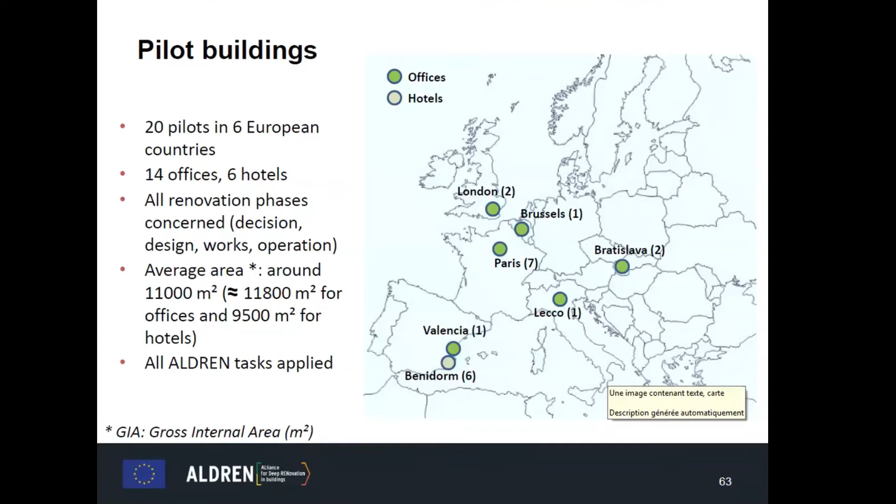Next, please. As I said before, we managed to apply all tasks, and each pilot represents one piece of the renovation process, not covering the entire ALDREN procedure. We tried to test as many indicators as possible for each pilot, but at minimum, it is through the sum of the 20 pilots that the whole ALDREN procedure has been tested. For example, we tested the TAIL index on 11 buildings, and the gap between calculated and actual energy performance on 7 buildings.

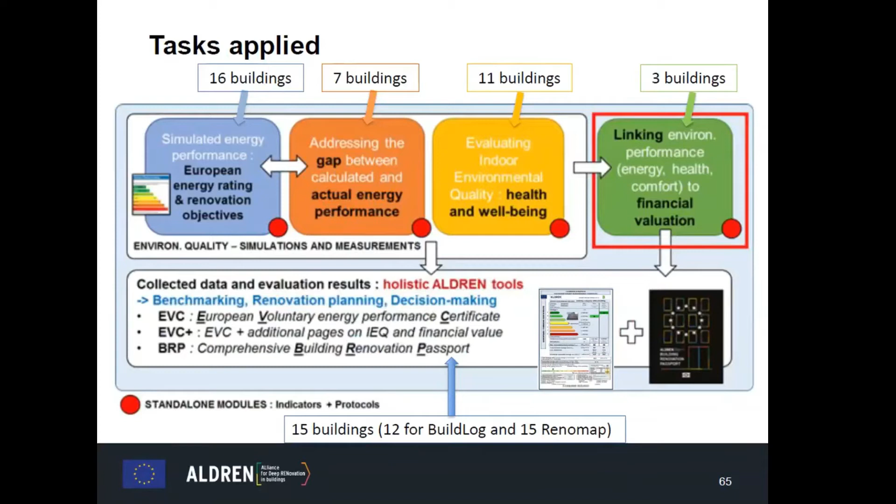Next, please. So what are the main results? Here you have the energy savings triggered by the project. This energy consumption is only for the end uses of the European directive on energy performance of buildings, so this is about heating, cooling, lighting, ventilation, and hot water only. We reached an average gain of 120 kilowatt-hours in primary energy per square meter a year, which corresponds to a gain of 3 to 4 classes on EVC rating, and we managed to reach class A or B for the majority of buildings tested.

You can also see in the table on the left the average consumption before and after for hotels and offices. For offices, the average gain is around 110 between before and after renovation. For hotels, this is a gain of about 150 kilowatt-hours per square meter a year. These results are very promising, in the sense that studies were not really conducted with design teams, but in parallel to their work, because of the time frame of ALDREN and of building projects.

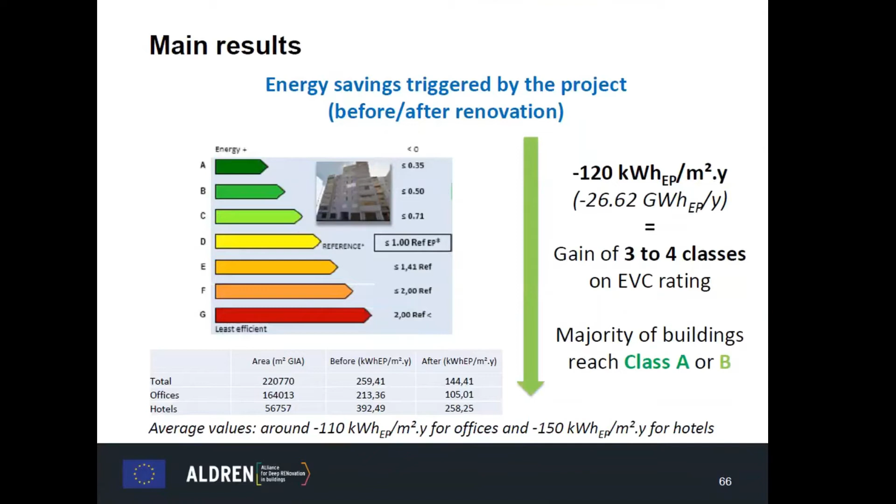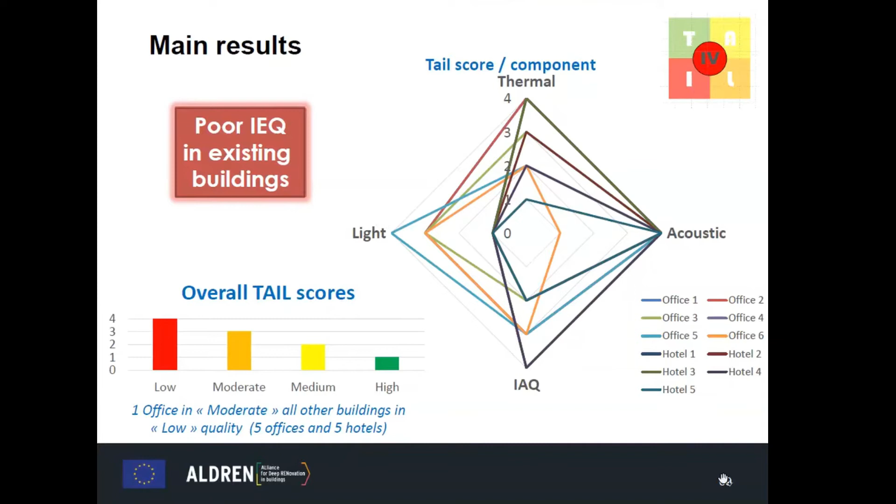We have all the buildings in low quality, except one, which is in moderate quality. I think this is because the overall TAIL score is the lowest class of the 4 components. But the main conclusion is that indoor environment quality is poor in existing buildings.

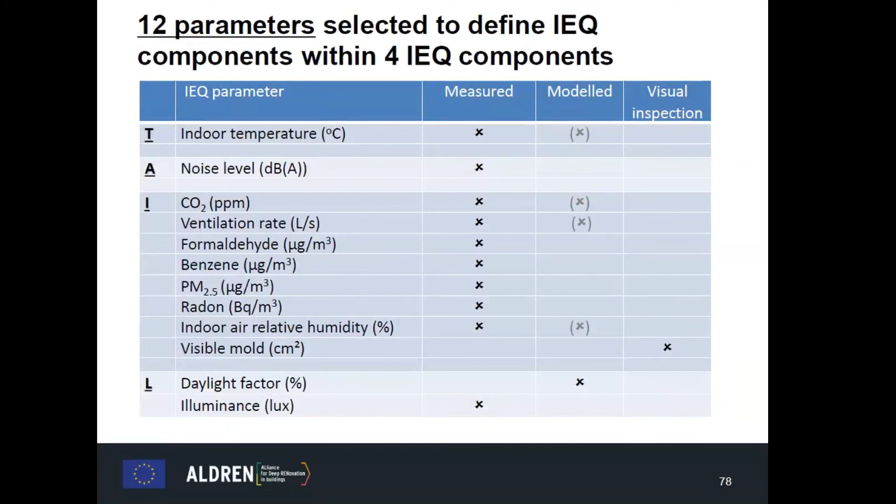Each of these 12 parameters is assessed according to 4 categories. These categories are defined by standards or by the World Health Organization, as we discussed earlier. For example, for formaldehyde, benzene, or radon, we use the different WHO guidelines that exist. So the 4 categories range from category 1, green, high level of quality, to category 4, red, poor quality. Each indicator is associated with a category at each monitoring location in the building.

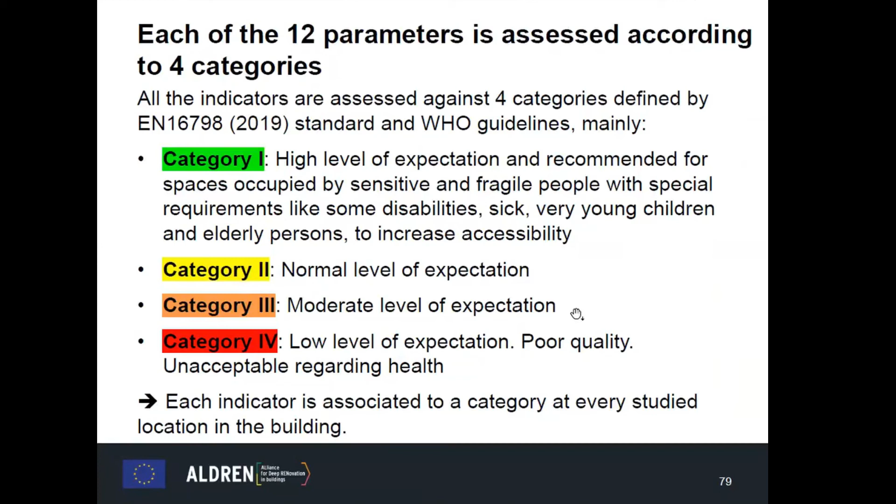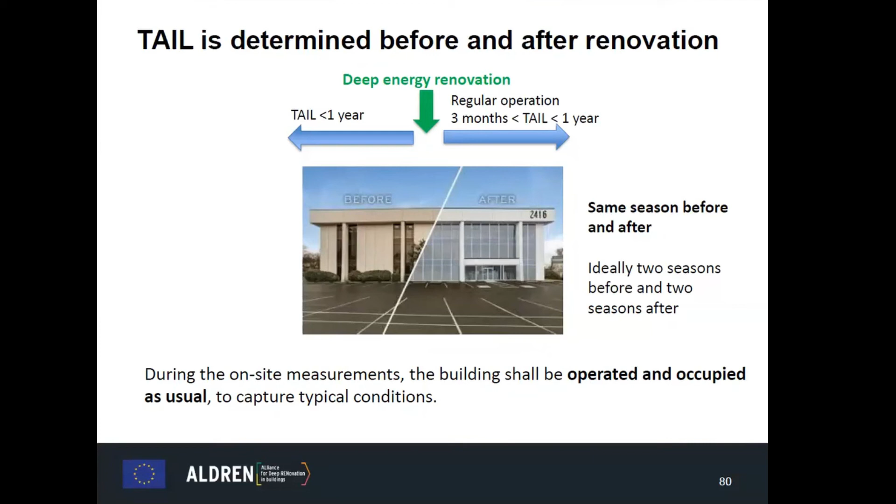Tail must be determined before and after renovation to be compared. And since we know there is a seasonal variation of indoor environment quality, to make a proper comparison, measurements must be made at the same season before and after the renovation. This is important for comparison. Another important point is that to capture the typical condition of building operation, the building must be operated and occupied as usual during the monitoring.

Regarding the number of sampling locations, of course we cannot measure everywhere in the building. This would be too complicated and too expensive. So we made a compromise between the representativeness of the sampling location and the technical and economic feasibility. This compromise is to instrument between 2 rooms in very small buildings and 10 rooms, and these 10 rooms must at least represent 10% of the occupied area of the buildings.

Once again, since we cannot measure everywhere, we measure preferentially in places that are occupied all the time by the occupants. In office buildings, and in rooms in hotels, we exclude the meeting rooms or the lobby, for example. And we must have a diversity among the sampling locations.

For example, we choose the lowest occupied level in the building and the highest. We must choose different orientations, rooms oriented to the street and rooms oriented to the garden. And if there are different types of offices, single offices and open plan offices, we must have a mix of all these different locations. Once again, all rooms must be normally occupied.

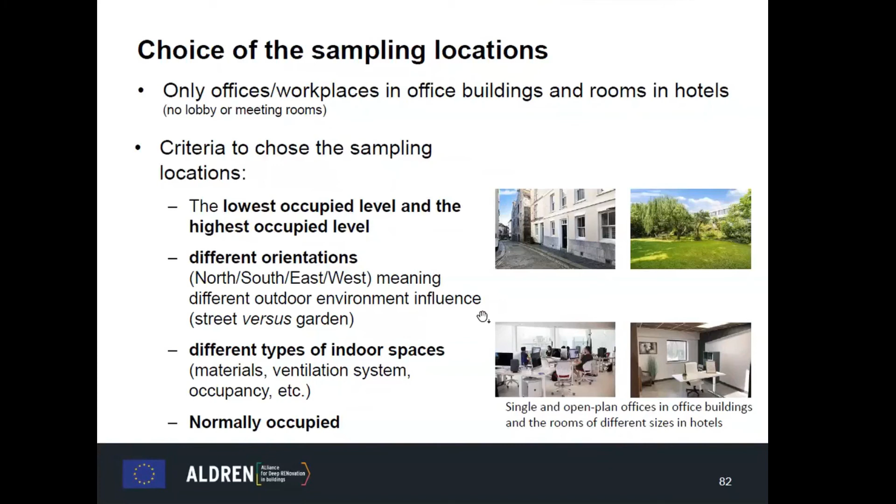The duration of sampling is different according to the parameters. It is 1 month for temperature and relative humidity, 2 months for radon according to the standard, and only if the building is in a radon-prone area. For all the other parameters, this is 1 week, from Monday to Friday in an office building, a typical working week, and from Monday to Monday, or Tuesday to Tuesday, or Wednesday to Wednesday in a hotel.

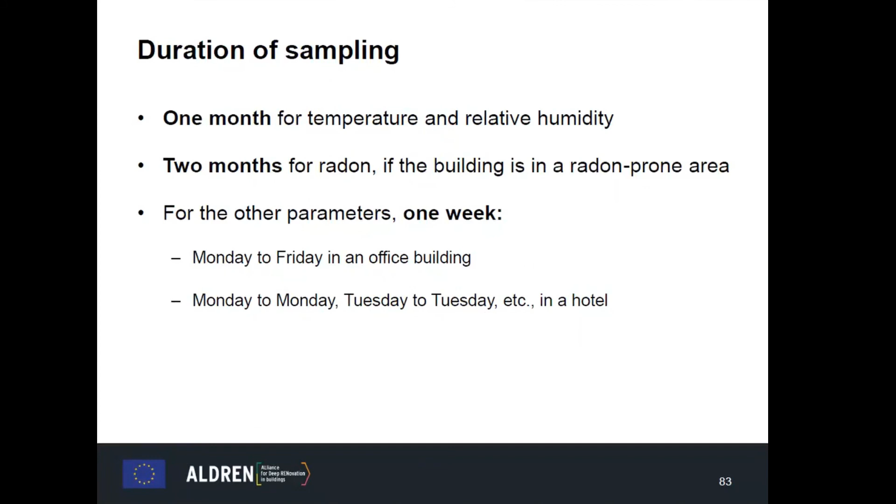So all this equipment must be put in the center of the room and must avoid direct sun or heating that would disturb the measurements.

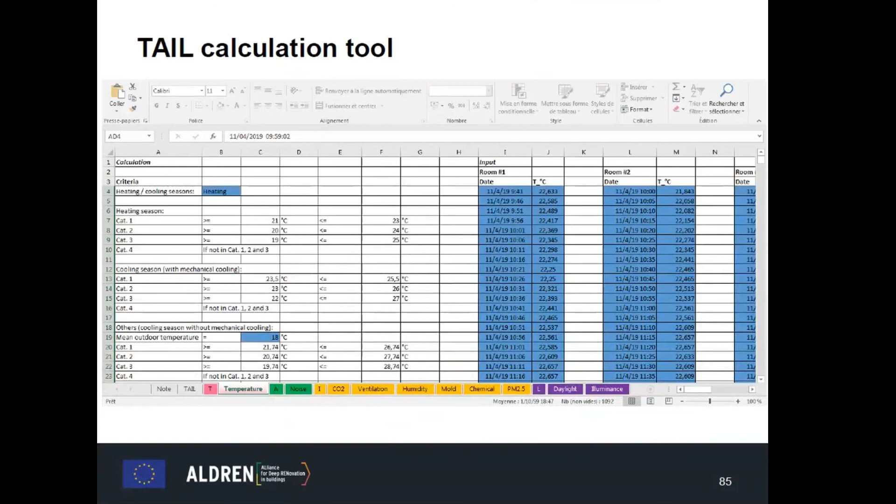To facilitate the calculation, we have elaborated an Excel sheet where you only put your measurement values in the blue cells, and all the calculation is done automatically for each parameter, and finally for the TAIL score, as you can see on the next slide. At the end, it directly calculates the TAIL score for the building.

So on the next slide, you will see the result of the TAIL calculation for the 6 office buildings and 5 hotels across Europe included in the ALDREN project. You can notice that there is a diversity for temperature, indoor air quality, and light, with light being the best parameter. But we observe a common feature for all the buildings, meaning a poor acoustic environment. This is something that needs to be targeted for the future.

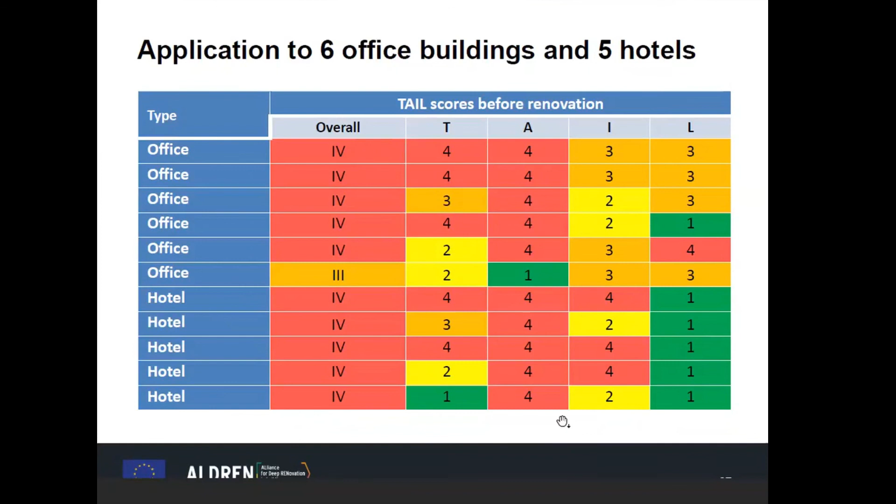So what we learn from this pilot, we learn a lot. We learn that the method we propose is applicable, it's not too complicated to do, it's classical measurements. We made some adjustment for the rating because we were a bit strict at the beginning, so we adjusted this to be more accurate in the evaluation.

We observe that we have differences across the buildings, so this is good, we need an index that is discriminant. This is positive. And we are able also, thanks to TAIL, to identify weaknesses in the building, to identify potential for IAQ improvement during the renovation operation. This is very useful for the building owners.

This is not the end of the story. We have in mind many developments for TAIL in the future. On a very short term, we want to do more sensitivity analysis on larger data sets, because 11 buildings is too small. So I make a call today: if you have data that you want to share with us, this will be a pleasure for us to calculate TAIL on your data sets to make it more robust.

We are thinking of adding new parameters, for example the inclusion of occupant rating. We plan to extend TAIL to other buildings, such as schools or dwellings. We are currently developing a framework for the prediction of TAIL according to different renovation strategies. We cannot measure, by definition, TAIL after renovation before having renovated, but it's useful to predict what could be the TAIL after, to make the best choices, to choose the better renovation strategy. This is what we are developing right now, and what we are calling PredicTAIL.

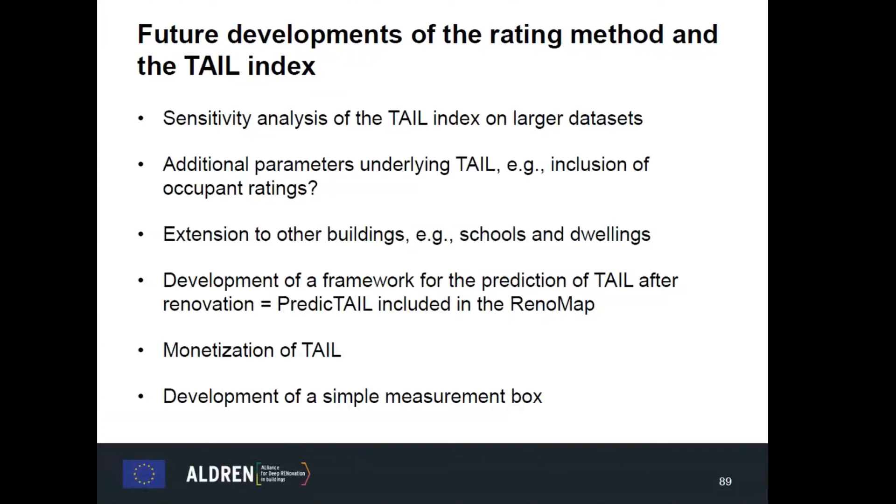We plan to monetize TAIL to have a stronger evaluation, to give more strength for the building owners, for the financial analysts, to convince them to renovate. And the last point is we would like to develop a simple measurement box to make the measurements easier. Thank you for your attention.